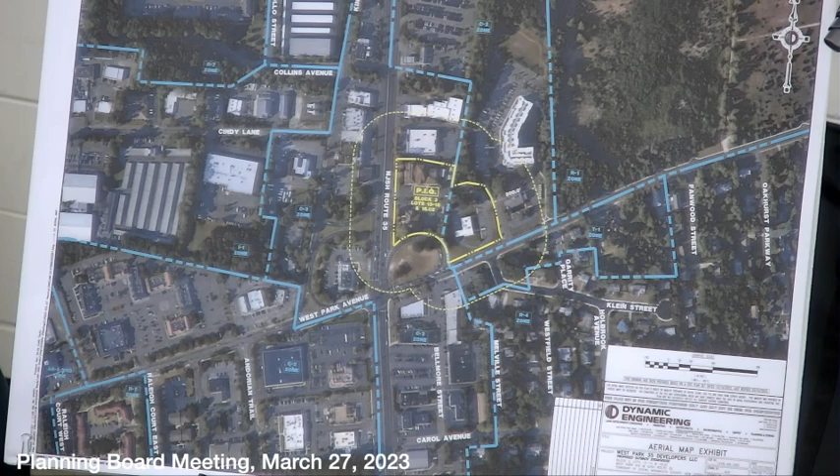With that, I'd ask that Mr. Sharrow be sworn. Yes, this very testimony you're about to give, do you swear to tell the truth, the whole truth, and nothing but the truth, so help you God? Thanks. Please state your name for the record. Matthew Sharrow, S-H-A-R-R-O-W, professional engineer. You're a licensed professional engineer and professional planner, and you've been accepted before this board and various other boards, not only in Ocean but throughout the state, is that correct? That's correct, the zoning board, this board, and all the surrounding townships in the area. Okay, great, you're accepted. Thank you.

So, Matt, as the expert here, I'd ask you to take the mic and try not to do what Sam did, referencing the exhibit that we moved in. I love how the engineers can never figure this out.

Walking through the exhibits and referencing them, why don't you explain to the board what's existing, what's proposed, and let's take particular note with regard to the setback to the actual roadway when we get to the jug handle.

So this is aerial map exhibit A7. In the center of the exhibit is the properties in question. 777 West Park Avenue is the existing bank lot, and 2105 Route 35 is the existing restaurant, furniture store, and dentist office, along Route 35. It's located at the northeast corner of the intersection of Route 35 and West Park Avenue.

To the north is the Salvation Army store and donation center. To the east is the U.S. Post Office. To the south is West Park Avenue with some commercial uses beyond. And to the west is Route 35 with some commercial uses beyond.

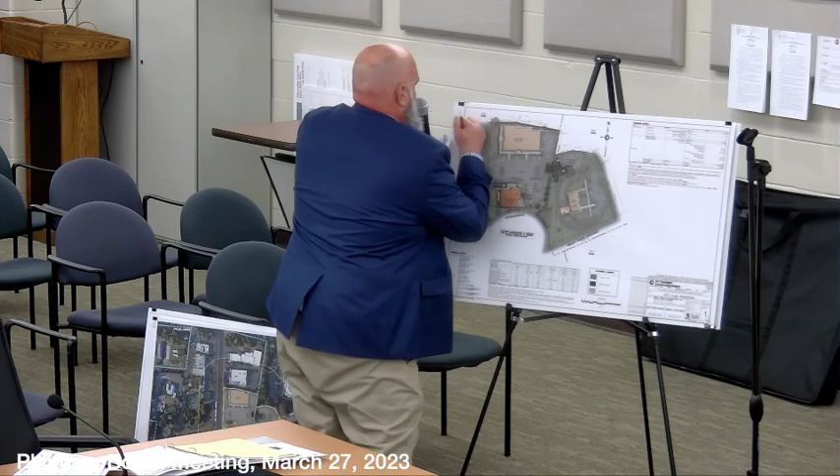Why don't you grab it since we already moved it in? Sure. So this is exhibit A9, the colored render. I'll just hit this for 2 seconds.

So that drainage easement runs through the center of the two uses right here, the two dash lines right through here, and then basically up the property line in a north fashion. As your board engineer stated, there is a manhole located in the new cross-access driveway between the two sites. That will just have to be protected during construction and then reset at grade when the pavement's installed.

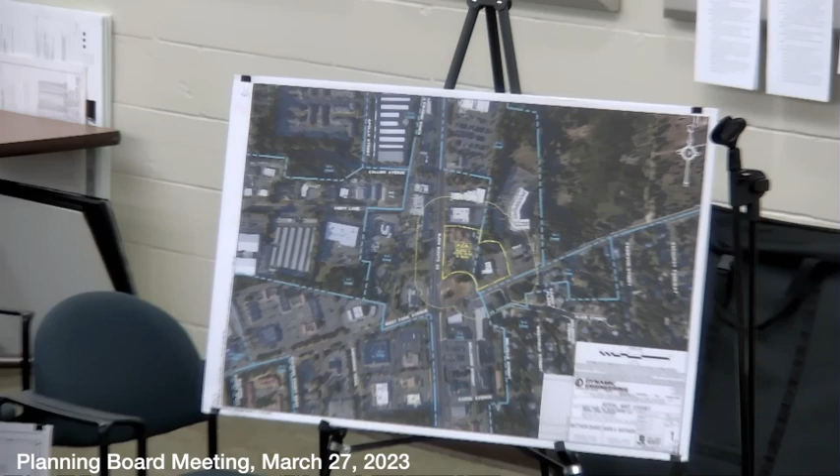And while we're talking about it, the only real construction where there's a potential for changing grade would be in that access. Are we changing grade 2 feet or more? It's very, very close because there's a 2-foot drop between the two sites. It's 1.9 feet. I don't know if it's going to end up being 2 feet in the end because there's not enough spot shots to tell. So that's why we put it on there.

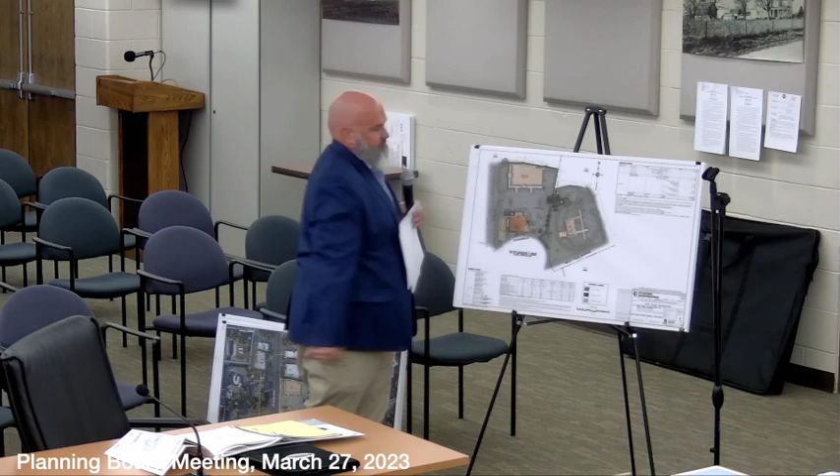So we would ask for the variance as it relates to that, just to have the proper slope between the driveway and the two lots. The purpose for that in the ordinance is to ensure there's no negative drainage impact by change of grade. This isn't the type of change of grade the ordinance is concerned about, is it? No, it's very minimal when you think about it between the two driveways. You're asking for the variance, yes, just to be sure so it doesn't go an inch wrong. Really, the intent of the ordinance is to keep too much fill from either being removed from the site or being brought to the site to protect the road system, and anything here would be negligible.

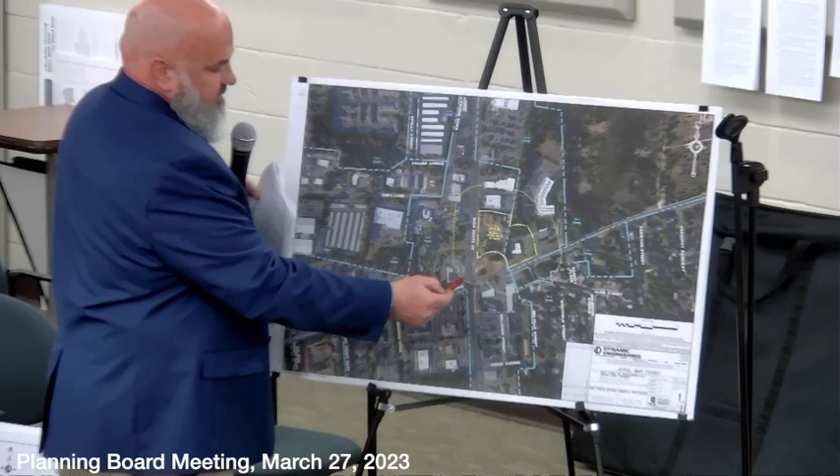So I just want to point out the setback variance to the jug handle, and I apologize, it's probably hard to see on this zoomed out version of the aerial. The restaurant is located just north, or just to the top of the jug handle. The jug handle wraps around the intersection on the exhibit here in the center. That's where that existing 20-foot setback is from the building to the jug handle property.

That's where all, if you hit that jug handle, which I know everybody in this room has, that's where all their refrigerator equipment, their AC units, their condensers, they're all sitting basically right between the property line and that 8-foot mark that we're going to talk about in proposed conditions. So in existing conditions, it's not open landscape space. There are improvements within that setback area already.

More importantly, how many feet is there between our property line and the actual roadway of the jug handle? Eight. So we're actually going to be set back 16 feet from the jug handle.

Correct. When I get to the proposed, I'll point out that it's 8.3, but yeah, 8. And also, it's just at one corner based on the orientation, which we'll go through. I just wanted to point out where that existing deficiency or variance is, and in that area is all that refrigerator units and compressors, and we're removing all of that. It's all being removed, cleaned up, and landscaped, which I'll get to in a few minutes, hopefully.

All right, I want to just really quick go through this one, just because it gives a better shot of what's being proposed tonight, and then I'll get into some detail on what's being proposed.

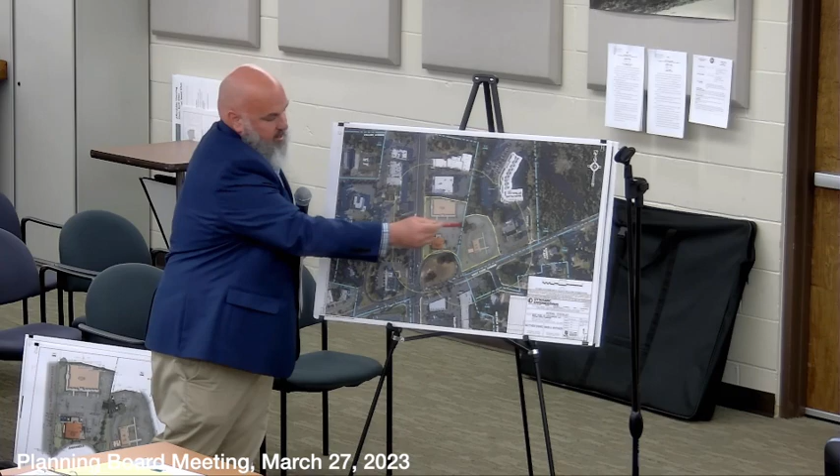And you said how many new spaces? There are 7 new spaces on the bank lot.

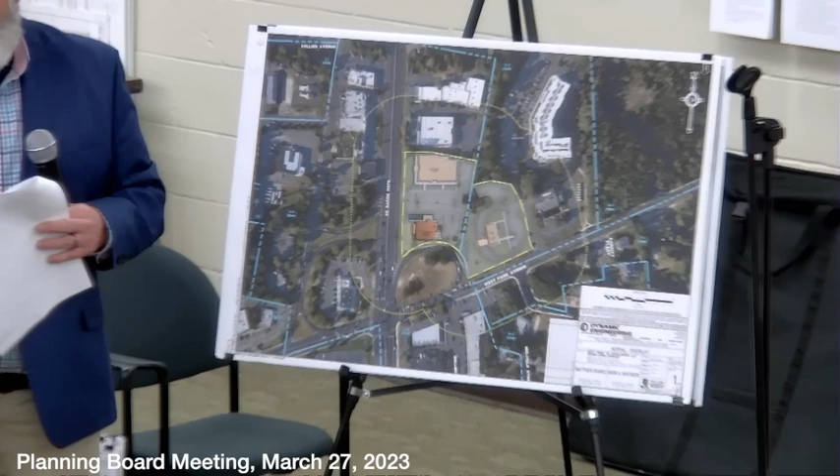So on the access point that's proposed, is that where that 200-foot notation is? Is that the access point? If you look at A9, it's actually darkened there, which is the color rendered plot plan.

Why don't you point out that you have the dark pavement where the connection is? This is a plan rendering, basically a colorized version of the site plan sheet in the packet in front of you. All the lighter gray, lighter orange, and lighter green are all existing to remain. The proposed is the darker gray asphalt, the darker green areas surrounding the building and the new asphalt between the two properties, and the darker orange and darker gray concrete for the new restaurant building.

As stated before, overall for the restaurant and retail lot we have 92 parking spaces, and for the bank lot we have 41 proposed parking spaces.

Okay, lots 13 through 15. So to confirm: 92 parking spaces for the restaurant and retail lot, and 41 for the bank.

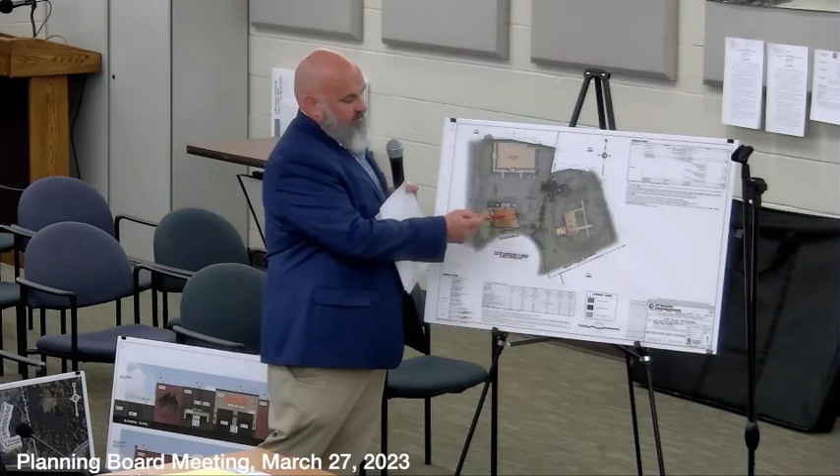Correct. So the new ones we're proposing along the front of the restaurant, as well as the ones at the cross access, are 9x18 with hairpin striping. There will also be a loading zone adjacent to the restaurant, a 16.9 foot striped area to the east of the restaurant.

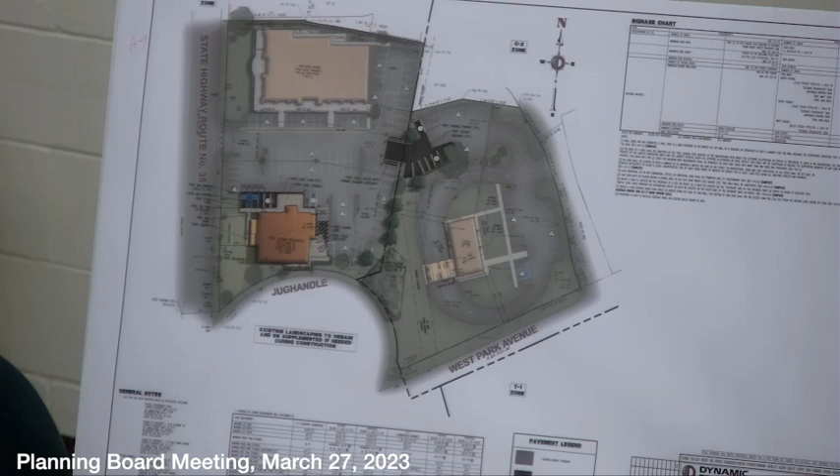While I'm there, the little gray, odd-shaped area next to the restaurant, on the east side, is the trash enclosure. That's an 8-foot-high wall with 2 dumpsters inside, and it also houses other equipment they use, like CO2 units. It's fully enclosed, with access through a man door, and access into the store.

While we're over in that area, the plans submitted didn't show landscaping, but you're actually showing that entire area to have shrubbery up to the property line. Obviously we can't plant in the right of way. That's correct. So we're going to plant shrubs where there's a sidewalk off the south side of the building, for access from the emergency exit. We'll plant shrubs between that sidewalk and the property line, and along the rest of the sidewalk, to screen the trash enclosure wall as well.

Just a question on the motion from, what is that, Huss Road? John Huss Road, into that bank and then into the other parking area. Is there any concern about that movement? The similar concern is that it's going to instantly be used as a cut through off West Park Avenue to avoid any traffic on that jug handle. Is there any consideration for speed bumps or some other design deterrent to limit that cut through?

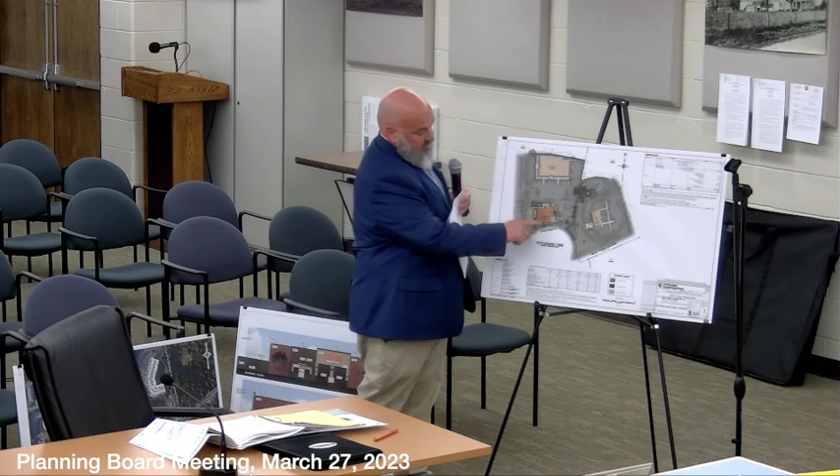I just wanted to point out the setback variance to the jug handle. The orange is the building - you have 8 feet from the building corner to the property line, then another 8.3 feet from the property line to the curb line, so a total of 16.3 feet there. That's just at the corner, because the building is parallel to the highway - that's only the closest pinch point. The actual facade of the building goes further back as the jug handle turns, and at the southeast corner of the building, we're 24 feet from the property line. Going back to Exhibit A9, the other corner along Route 35 and the jug handle is actually 24.4 feet from the jug handle, so it really is just that pinch point.

And that's why we're going to add some shrubs there, just to have a little screen buffer. And again, that area, if you looked at an existing survey or drove it, is all refrigerator units, mechanical equipment, and AC units that the current restaurant uses.

Two questions - in your opinion, is this going to be an aesthetic improvement over what's there today?

Yes, for the two simple reasons I just stated: the landscaping, and getting rid of all that equipment off the ground. Secondly, is it a better zoning alternative, in your opinion, to have the building front on the highway as opposed to address the jug handle in a parallel fashion? Obviously, fronting on the highway is where you want the building to front. The jug handle is just a jug handle. Okay, thanks.

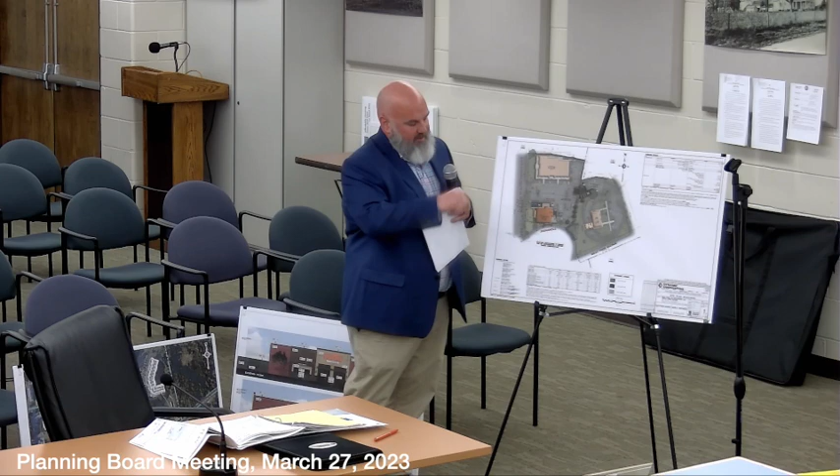As far as lighting goes, there were two comments in the board engineer's review. We're going to address them and comply. One comment was about a little bit of spillage onto the north property line near the jug handle. We can adjust the lighting to eliminate that issue. The other comment was about a 25-foot high light pole instead of a 24-foot high light pole. We're just going to lower it down to 24 feet to address those two comments.

I went through a little bit of the landscaping already, but I also want to mention we have landscaping on the south side of the building. There's a big open spot, a little landscape area at the edge of the jug handle, and then further south towards the furniture building there starts to be more landscaping. We're going to add a couple more trees throughout that area to add another landscape buffer and fill up that open area a little bit. We didn't give Jim the benefit of reviewing this in advance, so any landscaping we propose would be subject to his review and approval. The tree locations account for what hasn't been successful in the past — we want it to succeed, increasing the tree canopy but not blocking the view of the retail and restaurant. We'll work with Jim to resolve that.

For stormwater purposes, there's a de minimis increase in impervious coverage here — it'll function as it does today. The existing basin, I was out there today, will be cleaned up by the applicant; there's some debris in there prior to any work. Is that good enough for you? There should be an existing stormwater operation and maintenance manual that belongs to the site, which likely requires it to be cleaned out periodically. So that should be fine, and the continued maintenance of the basin goes along with it.

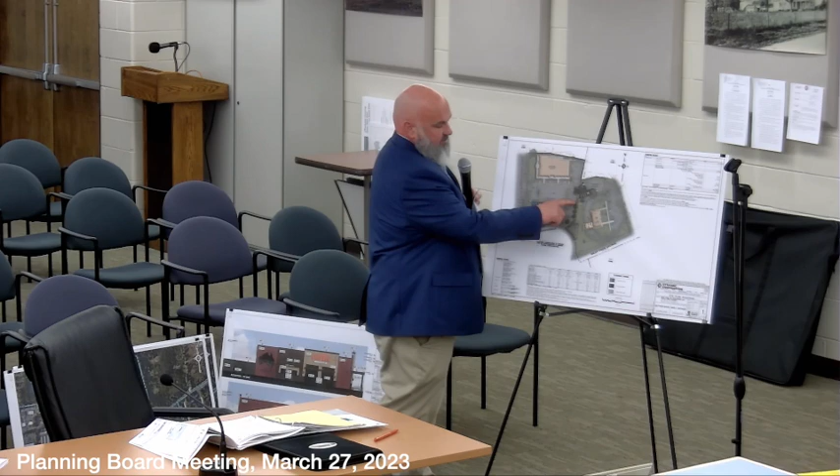And regarding the Environmental Commission's concern, can you point out the tree closest to that connection and confirm it won't be disturbed? Sure — there's a tree, a little lighter green, just south of that connection shown on the render, and that's the tree in question. We're not really grading anywhere over it; that parking lot is staying essentially the same grade it is today. So I don't believe any of the roots or that tree will be impacted.

Okay, so now let's move on to the architectural.

Real quick, this is, I believe, Exhibit A10. Yes, good memory, yes.

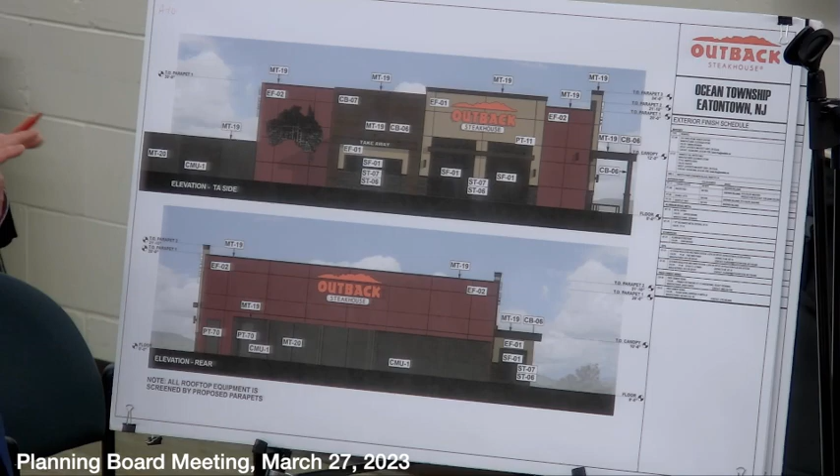There are actually two exhibits as part of this, stapled together for you. The first page of A10 is essentially a colorized version of what was submitted in your packet. The packet was black and white, so we just wanted to put a little color to it. It's an EIFS building with some accents of concrete board that give it some texture, as well as stone veneer throughout the elevation. There are a lot of glass windows, typical Outback, completely transparent, none blacked out. There are some signs, which I'll get to in a second, on the elevations.

I'll go through each elevation one at a time. There's a parapet along the sides and front of the building that will screen the mechanical equipment on top of the roof, so that's good. That parapet has a metal coping along the top to give it a little more architectural flair. Then there are aluminum canopies, or eyebrows, above some of the windows and doors. That's a quick glimpse. I'm not going to go through all the color palettes, but you can see it's a nice mix of maroons, browns, and tan.

Can you just orient me - that one on the bottom, is that the rear? I'm going to go through each one of them. Okay, good. All right, so I'll go through top, bottom, then top, bottom.

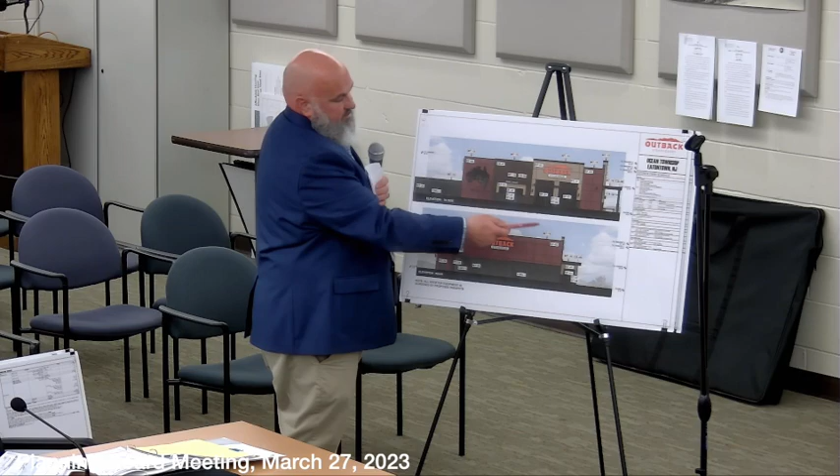So this one right here is the side looking from the parking lot. To orient everybody, going back to Exhibit A9, that's that side right there from the parking lot. You can see there's that little takeaway sign on the board, more of a directional sign to let you know where the takeaway carryout is. There's also the mural, the Australian mural, that Mr. Higgins talked about. And then there's your Outback Steakhouse sign above the doors under this parapet. Where's actually the door into the restaurant?

And then the back, we just have that one side, and that's actually facing the jug handle. So this one down here, real quick, that's facing the jug handle. So this is not facing the jug handle - oh sorry, this is facing the bank. Yeah, that's facing the bank right here. So that's where your dumpster enclosure and your outdoor attached refrigeration unit are.

Now, quick question - I couldn't see any details of the facade signs. How far do they extend out from the building itself, do you know? I can get that answer for you, but it's not 15 inches. Okay, but the Australia sign extends out more than 3 inches, right? Correct. So the board knows there's a technical variance necessary there. If it extends out more than 3 inches, it has to be at least 10 feet above the base of the building - I think it's 8 feet rather than 10 feet. But that requirement really wasn't intended to apply to facade signs that are flat on the facade; it was intended to apply to signs that stand out perpendicular to the building. So I don't have a problem with it - like blade signs at a retail shopping center while you're walking. Okay, all right, so those are those two.

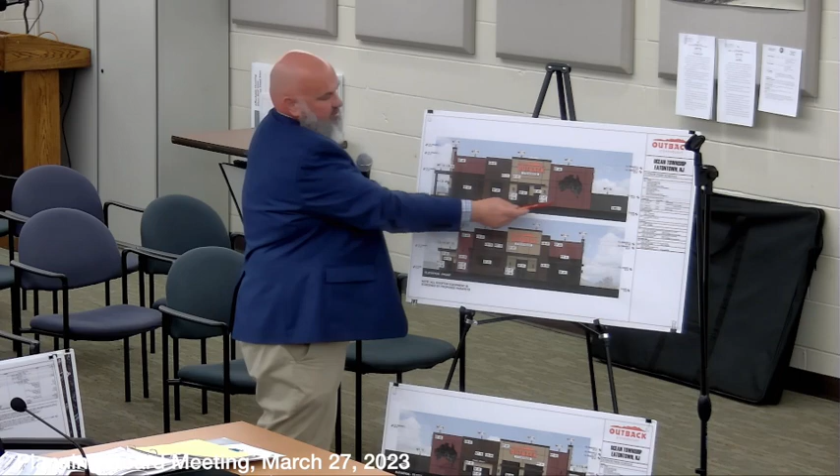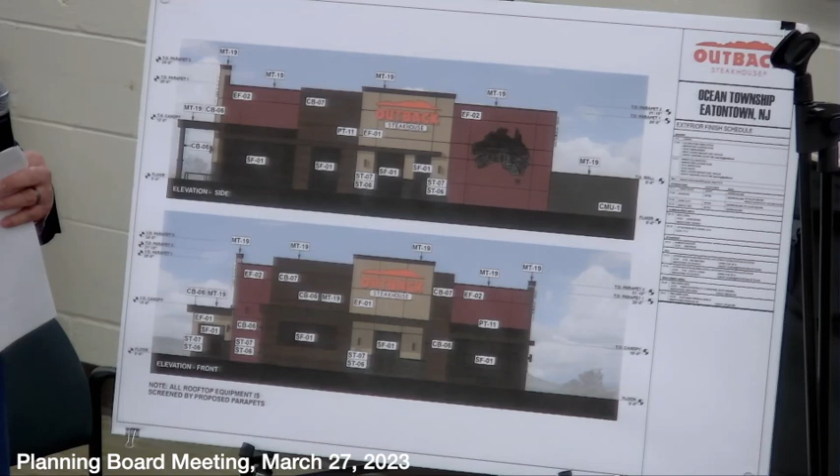Then I'll go quickly through the next two - these are probably the important ones. The top one is the one you'll see as you come around the jug handle. There again you have the Australian mural, the Outback Steakhouse sign, and this is your 8-foot trash enclosure wall. What's not shown here is all the landscaping that's going to be along that - yep, that would be on the plan. And then the lower one, that's your front door, the one you'll be looking at from Route 35. There's a canopy over the outdoor area - there's no seating area, but an outdoor waiting area. And then this is the little side door over here to the takeaway area.

All right, can I interrupt you real quick - so there's no outdoor seating for the restaurant? Nope. Okay.

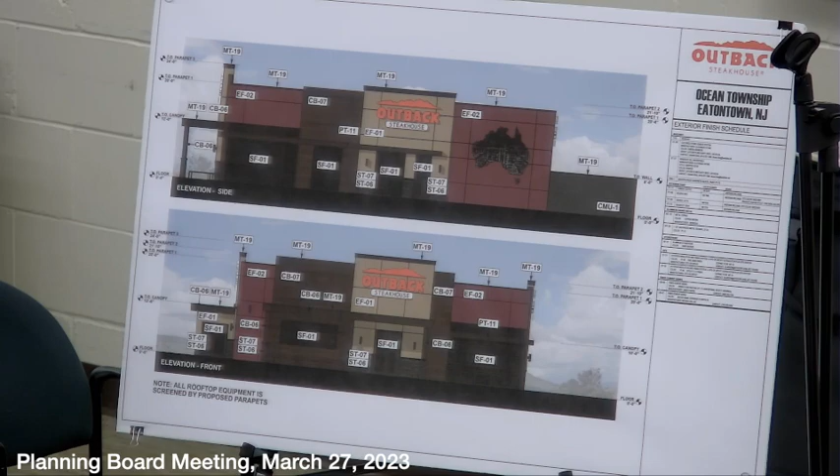Let me just go through the signage real quick, but I can reiterate what Mr. Higgins said. I think what's important is that the Outback sign identifying it, including the Outback Steakhouse name and the little mountains on top, is within the ordinance requirement.

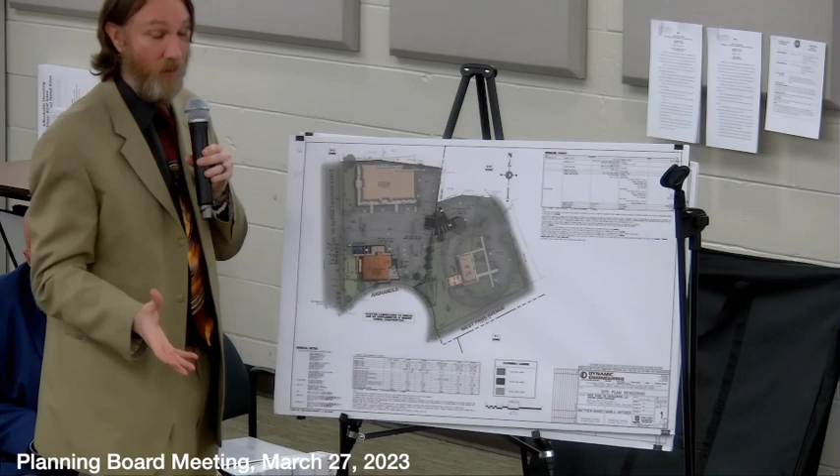What I did have a chance to do is measure what you're talking about in this straightaway, which is the only point that's straight, and it's about 200 feet. I'm not going to tell you a high school kid isn't going to get on the gas and do it, but most people aren't even going to hit 20 miles an hour in that stretch. Further, we have the retail establishments here, and the parking maneuvers start to create friction for vehicles traveling along there too. So I don't think there's any need for vertical measures to really slow people down.

Can I make a point? Sure, of course. So a point of historical interest is that back in the day, you used to be able to cut through there, and you could come on out there—this is going back way back. The truth is it really was a cut-through, and the traffic on West Park at that time was significantly decreased.

Now the traffic on West Park is significantly increased. I can't tell you people aren't going to do it—I can imagine that they would. I do like the stop sign, I think that's a great idea. We may want to consider, you have to think about the future here, because I can imagine everybody trying to get to that parkway, trying to get north on 35, especially in summertime when we back up significantly on West Park, people might just say, watch this. In high school we did that circuitous route, and it did exist—it was actually a private road at the time, but we all did it. I just wanted to make everyone aware of that.